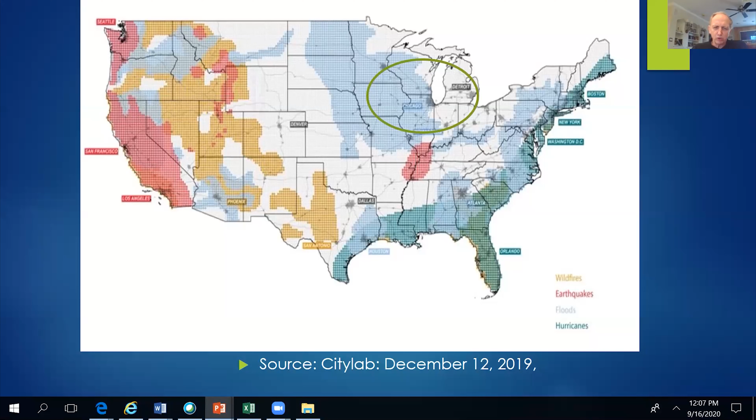But overall, Chicago is sometimes described—and I say this carefully because nobody's a winner of climate change—but if there is migration due to climate change, due to just the devastating effect, Chicago is probably positioned somewhat better than the coastal cities, which we'll get to in a minute.

Now, the reason this is so urgent is we know there's many factors that have caused this very frustrating decline in transit use since 2014, 15 roughly, where we're seeing a national dip in transit use. This is due to a multiplicity of factors. People always ask why, and unfortunately it's a laundry list. We won't go through those now. But a lot of the reasons: low fuel prices, active transportation options people prefer, and of course a lot of things with changing job patterns.

But we also know that when systems aren't resilient and they face catastrophic failure, two things happen. One, people often never come back. That unfortunately has happened around the country in some of the smaller systems where there's shutdowns and recovery takes years, if ever. But also, more importantly, people are reluctant to build a life around transit. So you want to park yourself next to a transit route, have either no car, maybe one car for an extended family, and use transit as a focal point. If there's any lingering doubt in your mind that this is not going to be a 365, 24-hour option, that option becomes less attractive. And we've experienced this in our region a number of times.

I think the one you probably remember most was the 2018 Yellow Line embankment washout, which kept—this links Skokie, the old Skokie Swift between Evanston and Howard Street, Skokie and Howard Street, excuse me—down for months and months. And it was partially a man-made problem, but it was a good indication that when systems fail, it can take much longer to repair if you're not, in fact, prepared with a clear resilience plan.

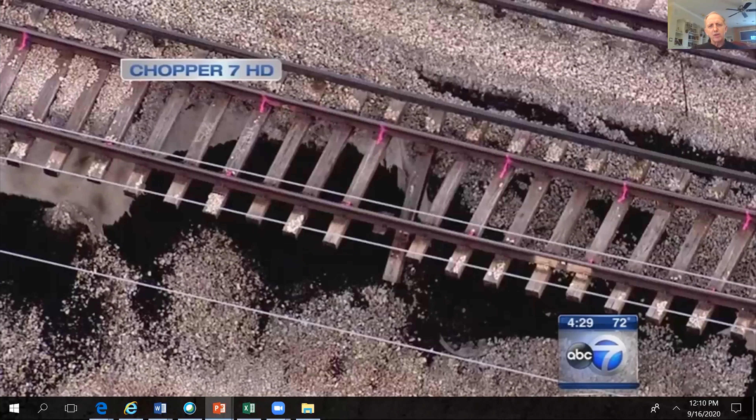This was a fluky accident, we'll see, but it seems like flukes are becoming more common now with the complexity of things. So I'd like to do—and you can see Yellow Line up here, it's an appendage of the system—but just to walk through, I think, why our system has addressed resiliency and made a lot of progress while still having, say, some major challenges that we've yet to address.

I'd like to start the story in 1957, which is not a date that's seen as a great day in the year of transit milestones, but this was the year we probably had our first taste, you might say, of contingency planning related to weather-related problems. This was a time when we had the Great Subway Flood. And this occurred when work was being done on the Congress Expressway, now the Eisenhower. You can see the median here, the transit line is being built.

In the process of building this, the pumps became filled with mud because they were building the Eisenhower, and it was dirt and it flooded. That prevented the drainage of water into the pipe system, and the pumps had to put the water into the Chicago River, which goes into Lake Michigan. I've since been told there was maybe a man-made failure to not open the locks, which made things worse. So it was partly a man-made crisis.

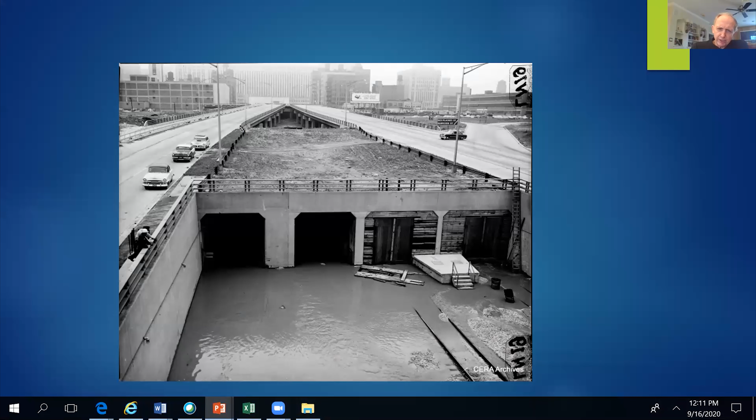But one thing it did was flood the subway, which wasn't opened yet here on this portion, and you can see the damage. It also flooded much of the Red Line and led to massive street closures around the city. Here's Union Station, which had its whole basement flooded. Much of the computer and mechanical equipment was in the basement of Union Station and suffered major damage. The trains were able to keep running, but it was an indication of how things can spiral.

This really should never have happened, because we have the system where the Chicago River dumps into Lake Michigan. Lake Michigan is typically low enough that we can open the locks - that creates a lot of environmental damage, but it prevents downtown flooding. When you throw in an unexpected problem like this, a man-made failure, you know that even the best of plans can fail. Union Station will come into our story a little bit later.

But with that, here's an example of flooding along the Milwaukee District line - the importance of flooding and pumping and gravity-powered design systems to relieve flooding. We've had continued problems with the Congress Expressway since then. It's one of our least resilient expressways because it's in a trough. So it was a bit of a wake-up call, but not a lot was done to our system at this point yet.

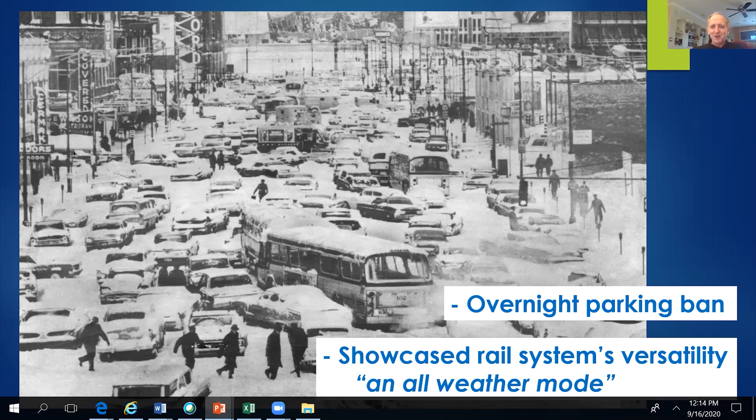I remember this movie, you guys remember this one, called The Out-of-Towners, which was about a storm in New York, and rail was the only thing running, and it was a mess. It was an example of how weather can - I think that's Jack Lemmon in the movie - it was just a great, almost advertisement for rail being more resilient than other modes.

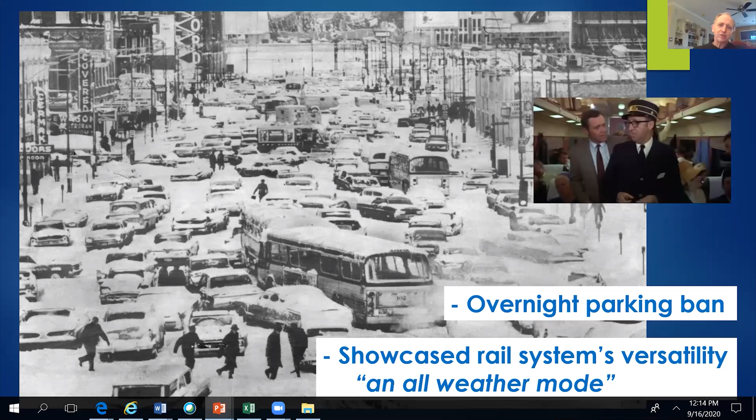But unfortunately, that image of rail maybe lulled us into a false sense of confidence, and then we had the great storm of December 31st, '78, New Year's Eve into '79. This is really where Chicago's vulnerability, its non-resilience, became unfortunately wide open, exposed. This storm began on New Year's Eve, but it was a series of storms, as we'll see.

A lot of you Chicago aficionados remember when Bilandic, the mayor, was running against Jane Byrne, the upstart, and this storm effectively catapulted Byrne's campaign into folk hero status as somebody who was going to do something about the terrible incompetence of our city in clearing the streets. We had days and days of gridlock and non-moving streets. But from the transit system's perspective, we'll see this was really the moment that Chicago began its ascent to become, in some ways, a troubleshooter.

So this was a terrible two-month-long thing. The powdery snow, this is from the Chicago L website, which is a great site. But we quickly saw the limits of our cars. The powdery snow was sucked right into the traction motors, these sort of self-ventilating motors, and choked off ventilation. So running these cars in the snow really exposed a weakness over time.

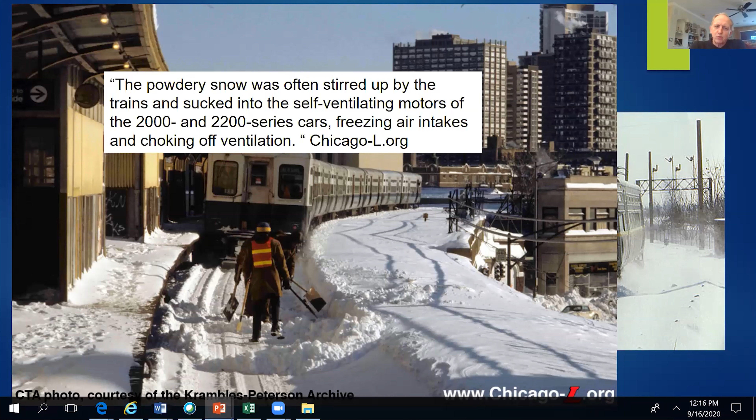And this brought Chicago to its knees. Offices were closed, and we'll see the CTA came up with some improvised snow plows. A lot of these were created on the spot, some were designed in CTA shops ahead of time, and this proved to be a really bad idea to run these things. Sometimes they just ran the cars without snow plows to try to clear the snow with the weight of the train, which is a kind of remarkable thing.

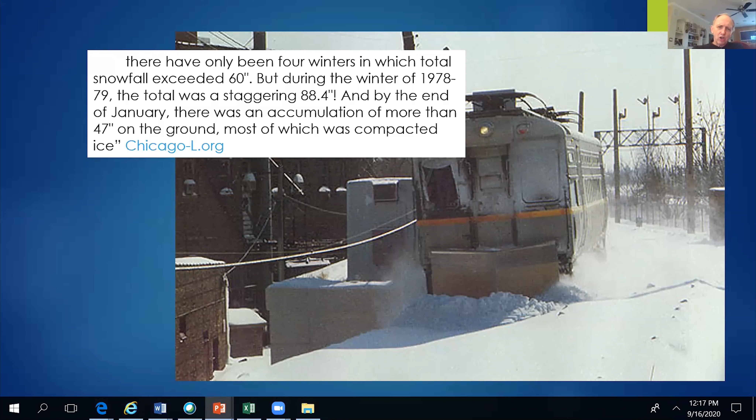We ended up having 88 inches of snow that winter, which is twice the average, 47 inches on the ground for a portion of it. This dragged on for weeks. I didn't move to Chicago until a few years later, but everybody was still talking about the legacy of this.

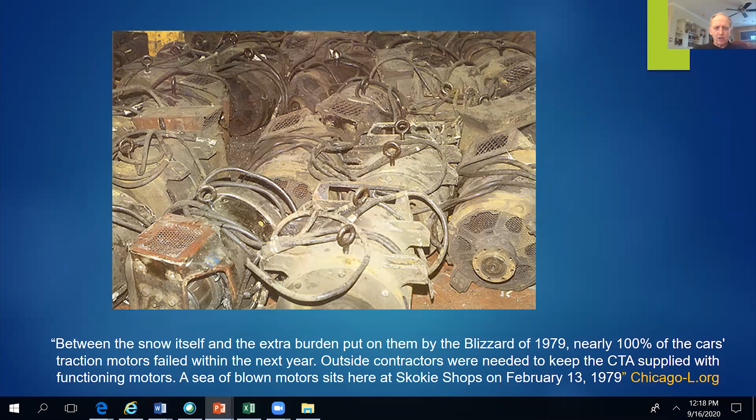But one remarkable thing happened, and this is an amazing statistic. Between the snow and the extra burden put on them by the blizzard of '79 - it was '78 and '79 - nearly 100% of the cars' traction motors failed within the next year because they didn't get the air intake they needed. They had moisture coming in from the snow, and at one point almost half the CTA cars were out of service because of the snow. Here's a stack of traction motors in Skokie. The system was just shown its utter vulnerability to this, it was incredibly expensive, and transit for the whole year was down because of the disruptions in service.

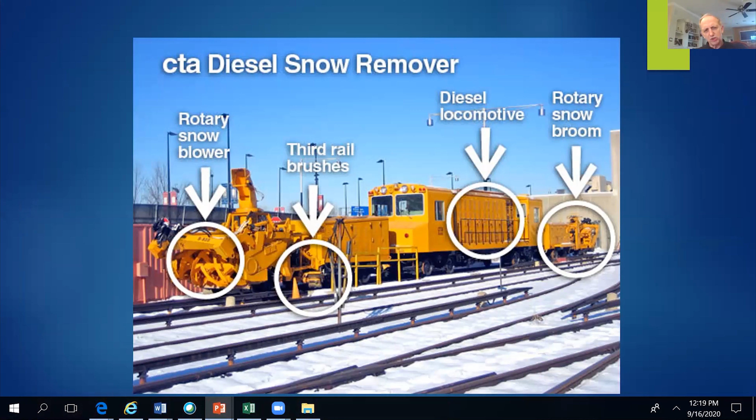So the CTA became in many ways a pioneer of dealing with snow, and we really learned the hard way. It took a while to get the system down. But with that, we've made specially designed snow blowers which you'll see on the system. Those are the third rail brushes I described, and there's a rotary snow broom in the back. So the '78-'79 storm really began this push toward custom-designed CTA cars due to our weather.

Also on the snow plow - and I say this being somewhat of an environmentalist - one legacy of that is we got the best system of snow plows and sand trucks and salt trucks in the country, you might say. And it kills me to see we get snow flurries and we have tons of salt being poured onto our streets just to prevent the 5% chance this could be the worst storm than we thought. So there's some environmental cost to having sand and salt dumped the way they are, but it's politically seen as imperative from the lessons of '79.

We also have a system now prioritizing a much more sophisticated system of snow emergency plans. Of course, you can't park on certain streets when we have snow emergencies coming, so that's expected - that's a legacy of the system as well. So Chicago with the winter, really has been a leader.

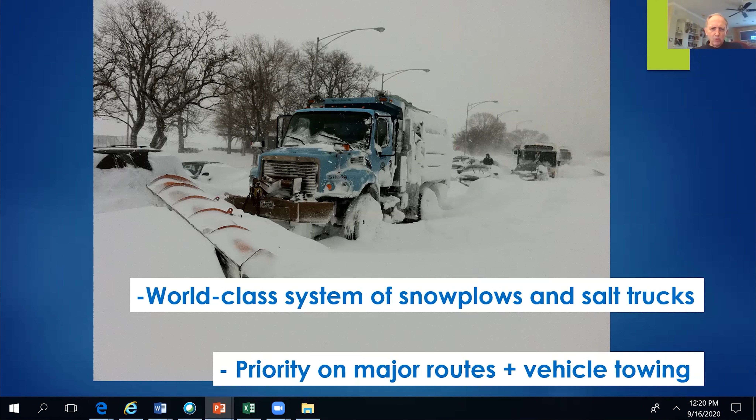Now in '92, we had the next crisis. I was actually at DePaul during this, and this was the Great Chicago Flood, which was caused by pilings being driven in the Chicago River up near Kinzie, near the Merchandise Mart. You can see on the right there.

And boy, this was a disaster that was almost 100% man-made, but it exposed, we'll see in many ways, our inability to understand the engineering of our system and to properly manage for human error.

And what happened here with these pilings was they were being driven into the river to create a support, and they punctured one of the tunnels that were built years ago near the early 20th century that linked all the rail stations, a system of underground tunnels that moved coal and commodities between the loop train stations and some of the big buildings below street, seen as a very environmentally cutting edge thing at the time.

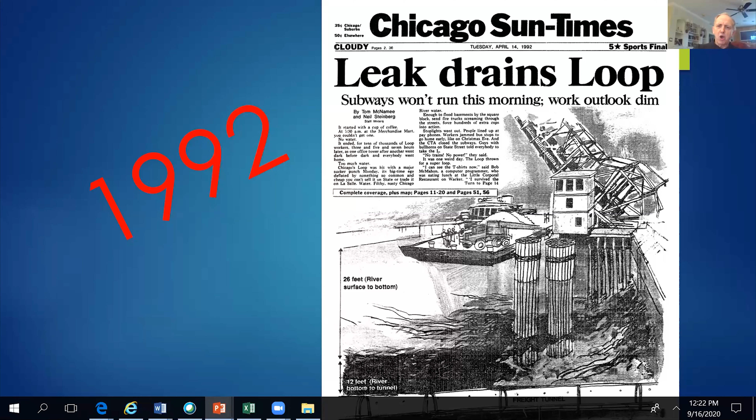Those were abandoned when the rail system, passenger trains diminished, but that tunnel system prevailed. And when flooding got into those tunnels, it really almost was an embarrassing set of compounding problems that devastated many building systems that were built below grade.

Here's a couple pictures of that from the DePaul era. For example, I direct the Chaddick Institute, and many of the Chaddick records were lost because they were in the basement of a building on Madison that were flooded.

And so once the tunnels flooded, the water rose almost to the level of the Chicago River. So anything below grade was damaged. And for a transit system, we had transit outages. Of course, the subways were badly affected by this, but it created a lot of issues with unsafe electrical conduits down there, with control systems being below grade.

And so it was a real indication that unanticipated problems are almost as bad as things you probably can anticipate, like weather. And it was an amazing day. I remember, fairly new at DePaul, just thousands of people heading to the train stations in late morning to go home, saying, 'You must go home, we have a flood.' Nobody knew what was happening.

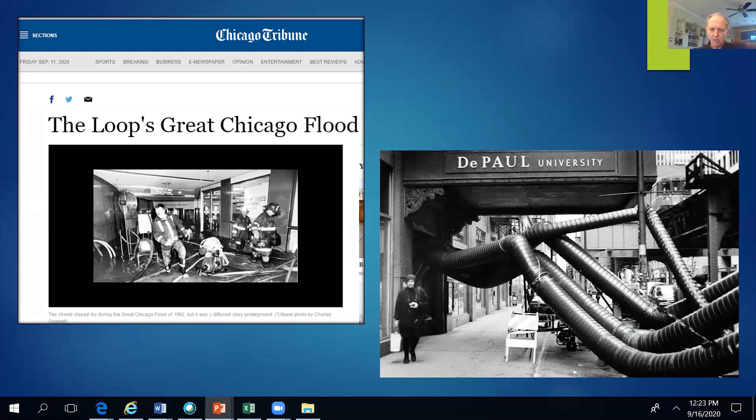And with that, here's another picture around DePaul. You can see just the water coming up from one of the manholes. But it really made clear to us that we're just stacking infrastructure on top of each other in the city.

You have decades of infrastructure, from utility corridors to tunnels to private easements to above ground telephone poles with substations, and we had sort of lacked a plan to troubleshoot if some aspect of the system was overlooked.

And we'll see here we ended up putting bulkheads on the tunnels below grade. A lot of changes were made where people ceased using basements, which is probably a bad idea to start out with in our region because we're so flat and we have trouble with drainage.

So the system, interesting enough, Union Station installed massive pumps after the 1957 flood, but 2 weeks before this disaster, I was talking to Mark Walbrun, and he said that they decided to move that stuff out of the basement, saying 'we had a flood in '57 while we had the pumps, this is probably not a good idea.'

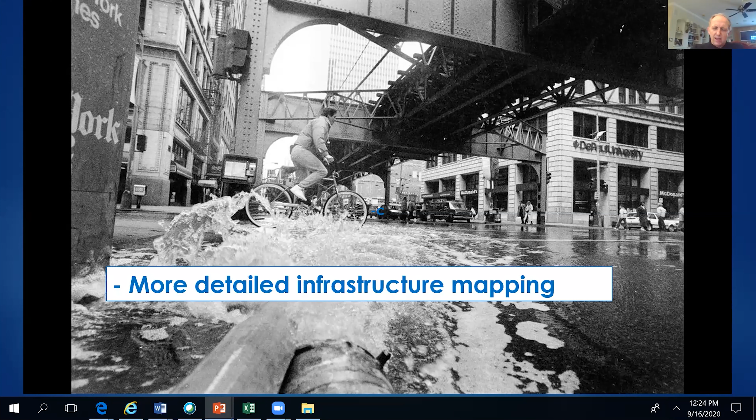So Union Station, most of the electric circuitry was moved above to the second floor. The trains kept running. So the Chicago flood is deeply etched in our need for layered analysis of our infrastructure before we take action.

But I will say it wasn't until 2012 that the word resilience came into common use. I don't remember personally using this term until after the 2012 crises that put to shame everything. It wasn't Chicago, but it was the effects in New York and the East Coast of Hurricane Sandy.

And the remarkable thing about this is we knew this was coming for days, and we could take actions to get people out of harm's way, but there was virtually nothing we could do to limit its effects. We can get the equipment put at the high ground, we can do our best, but when it came to the storm surge with Hurricane Sandy and the age of the infrastructure in New York, we had an outcome that was just staggering.

And what happened in New York is something we really didn't have during any of these crises in Chicago, and that was a sustained severing of the entire transit system. So if you're familiar with New York, you probably know that southern Manhattan is just a spider web of transit lines. The minute I think I know New York's transit system, I'm there and I discover a line that I didn't really notice before.

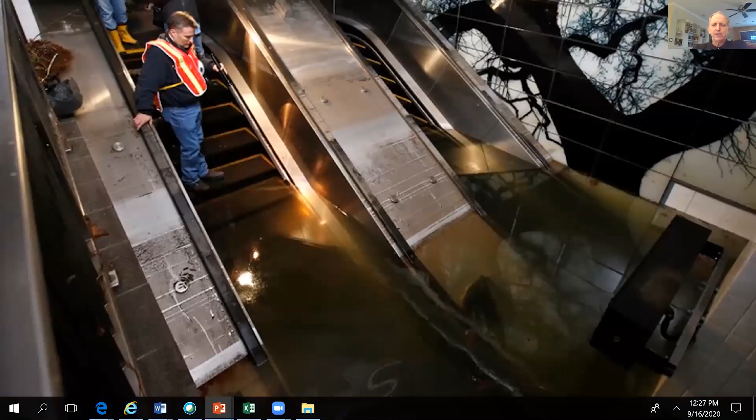But we saw with Hurricane Sandy that when things do get completely submerged, here's an escalator at one of the South Manhattan stations. You can see how high that water came up. Not only did it flood the tracks, but it crossed the platform with 5 feet to spare, which, when old equipment is exposed to water for that limited period, you can see where short circuits, accelerated rusting and depreciation is going to happen.

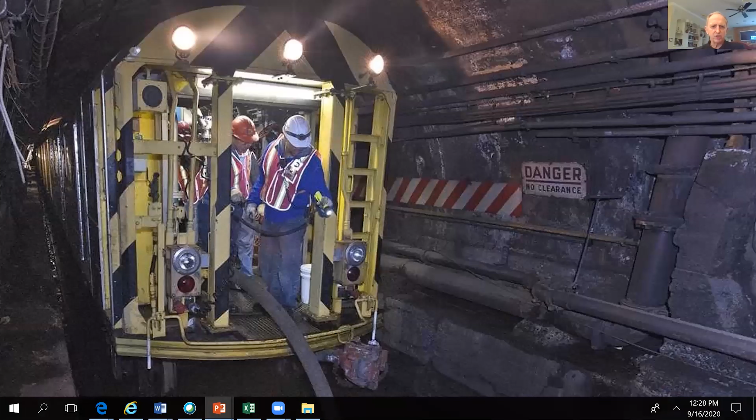So while they got the tunnels drained and could run trains at somewhat reduced frequency for a while, still today they're working to try to get the system back reliable. They had the Summer of Hell a few years ago, which was famous in transit circles because everything bad happened at once. Penn Station's problems, the subway problems. And they're finally digging themselves out of that.

Of course, COVID creates a new challenge of how it's all going to be paid for. But it really rocked New York, and it started this whole movement that we have to quit looking at problems one at a time. Here's another picture of just some of the damage.

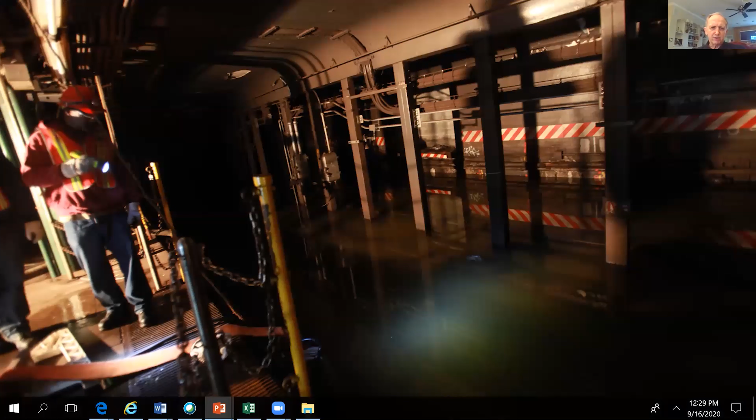We need to have full-blown resilience plans. And we'll talk about how this is more than just putting in the right equipment to prepare for disasters. It's actually to expect the kind of disasters that nobody saw coming.

So when we saw the resilience planning take effect, we saw a whole series of things happen.

I'll just say in 2014, the last thing in Chicago, we had the polar vortex. And those of us who are around as transit users, this is all the moment we said, why am I living in Chicago? I just remember weeks and weeks of walking to the train and just crunch on the hard packed snow. One day looked like the next, and it's dark by 6 o'clock.

And it just seemed, and the transit system had big problems during this period. Mainly the electric line, which I used, was over in the South Shore line. We'll see the electric Catenary had problems, but buses were freezing up. Wasn't a disaster system-wide, but it was periodic outages.

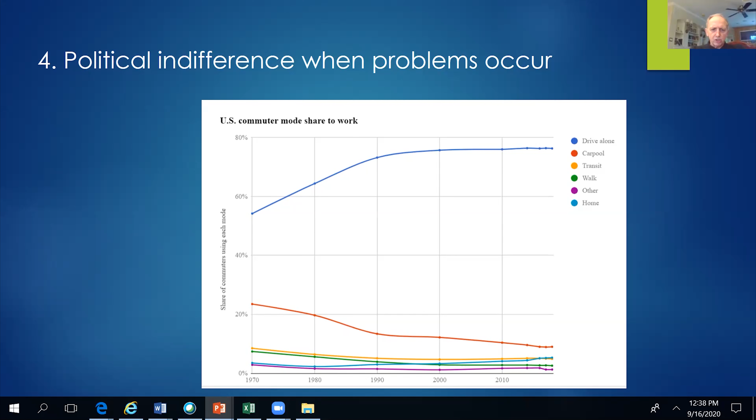So when we look at the sustainability of the system, we can see we're making pretty good progress in some areas. In other areas, we're still pretty deficient.

One thing I'd say we did a great job on: the whole CTA system is now third rail. In 2004 we converted the Skokie Swift yellow line from electric overhead catenary to third rail, which has really improved reliability during extreme weather events. That line now has a lot of momentum, with some new stations and other improvements.

We also saw the South Shore line complete a full replacement of their old catenary system. It's been a major, gradual project, really exciting to watch the South Shore line go from a sleepy interurban to a pretty cutting-edge urban railroad. This year they're starting a new branch that will run the West Lake corridor down to Munster, reclaiming an abandoned railroad route. That segment will be diesel powered, but the trains will enter the main line and use electric to reach downtown. So the South Shore line is really exciting to see at a time when there are so few new rail projects happening.

It's a double-track project being done in very interesting, successful stages. And the CTA and Metra now have much better power redundancy on their electric lines than they used to, so we don't get the outages we used to have when a substation fails. I think those are pretty good successes.

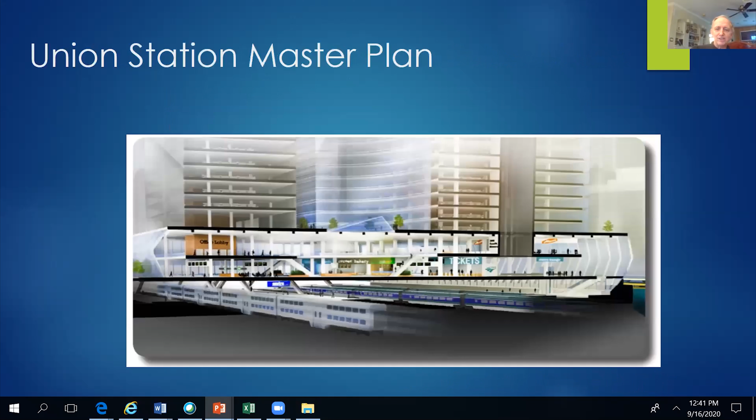More importantly, Union Station has this massive overhaul underway, being done in stages. There are all kinds of issues with the station now, from ventilation to older concrete that needs replacing. Amtrak, developers, and Metra have been gradually improving Union Station. The Great Hall looks great now, and some of the latest efforts are focused on the track design.

One thing that makes life so much better now—we're seeing this play out during COVID—is that we have all these other options we didn't have before. We have the second scooter pilot happening now, and we also have car sharing: Zipcar is all over town. We lost Car2Go last year, which was a shame, because they had a different model than Zipcar where you just paid by the minute. We also have electric bikes being deployed, and of course a system of bike lanes. So in some ways, when the transit system goes down, we now have much better ways to get around.

We're seeing this during COVID, when transit's running but people may not feel safe, so they're using these alternative options. Uber and Lyft are part of that mix in a pretty big way. It's not quite like '79 when you had two options, transit or drive or walk, because biking was so trivial then. We have to view active transportation and micromobility as a pretty good escape valve. Of course, that doesn't do you much good when it's below zero to jump on a scooter, but COVID's mostly been a warm weather phenomenon.

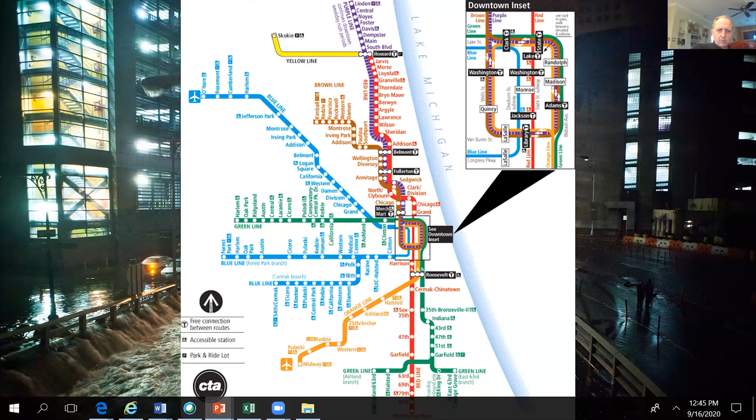You can see here in the Loop just the complexity of how we have those kinds of options, which is a remarkable thing. And a bonus, I'll say, we're doing really good at O'Hare and Midway, especially at O'Hare with the runway expansion plans. It's not transit, but it's indirectly related. With the runway expansions essentially being complete, now moving to the new global terminal, going to be built for Terminal 2—things are happening out there that are really good.

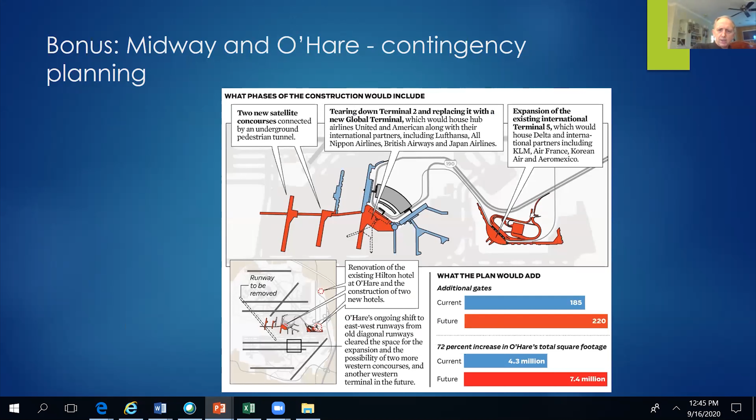So I'll call this works in progress—you might say these are weaknesses or challenges. Some of these are fixable without lots of money. Other things are just facts of life we have to contend with.

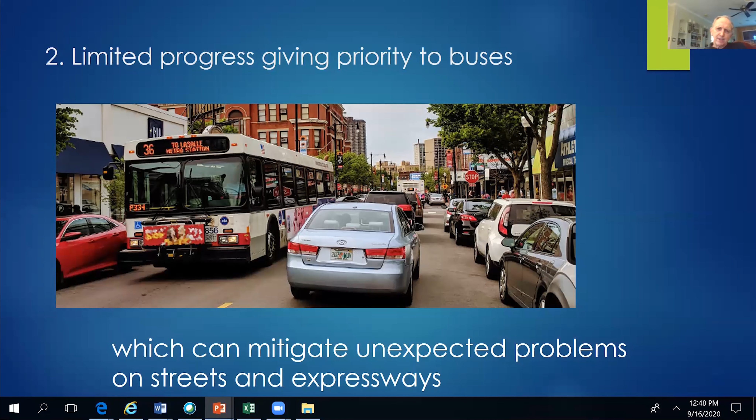But the RTA has a big system now to do signal prioritization, Ashland and Western, 100 miles of routes, 18 projects. So it's going to happen, but we're playing catch up there. Thankfully this project is moving ahead, but it's something we're behind other cities on.

We have some problems with relationships between railroads and public agencies. I won't get too specific here, but it's never a good sign when people are suing each other. Let's put it that way. We have a couple examples like that.

Amtrak is breathing down CN's neck for on-time performance. Metra and Amtrak at Union Station, there's some disputes. Union Pacific wants out of the operation of its commuter trains, so Metra are going back and forth. It's just an unfortunate reality that we're not always one big happy family, and that makes resilience much more difficult.

So I'm down to my last 2 minutes here, and we'll open up for questions.

Positive train control - this is the big mandate from the federal government, and in 5-10 years somebody will look back and say we're so glad we did this, but right now we're still in the painful stage where massive resources are going to this safety system. It does one thing well - it really prevents collisions and human error - but it doesn't solve many of the other problems we have, and diverts money from those other causes.

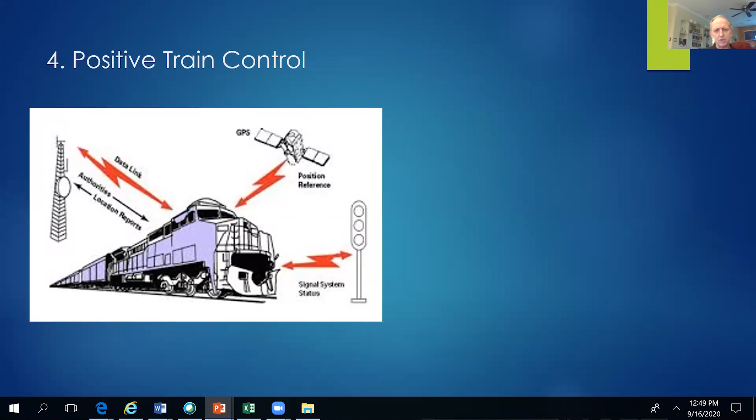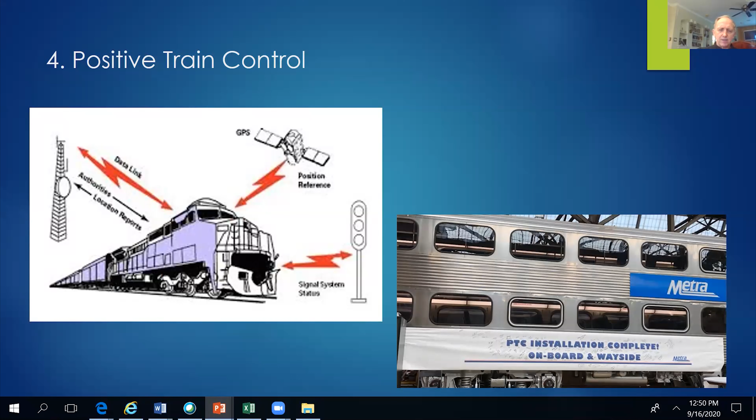Metra has got to meet the deadline, but I have to say it's at the moment created a lot of complexity to our ability to respond flexibly to emerging situations and threats because of the difficulty of adhering to all the mandates of positive train control.

Our viaducts and bridges continue to get older. Here's a success story, the Metra bridge over the Fox River, which was a big project. You can see just driving around that we have a lot of work to do there.

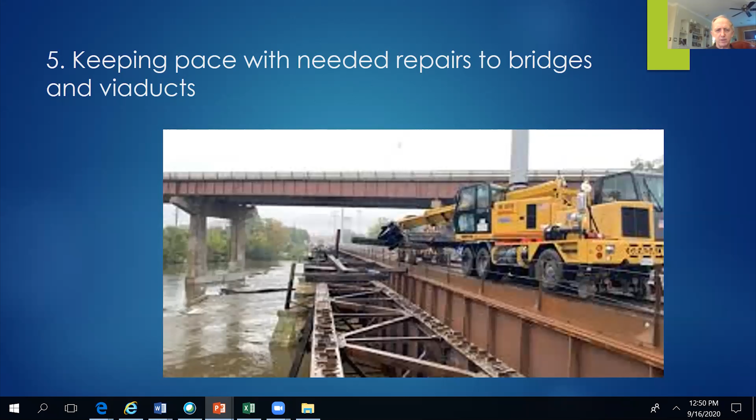Our pumping systems, a lot of this equipment dates back decades. If we were to have another major flood event, could our subways stay dry? Hard to know. Underpasses, below grade systems - a lot of the equipment is really aging, and so we have big vulnerabilities there.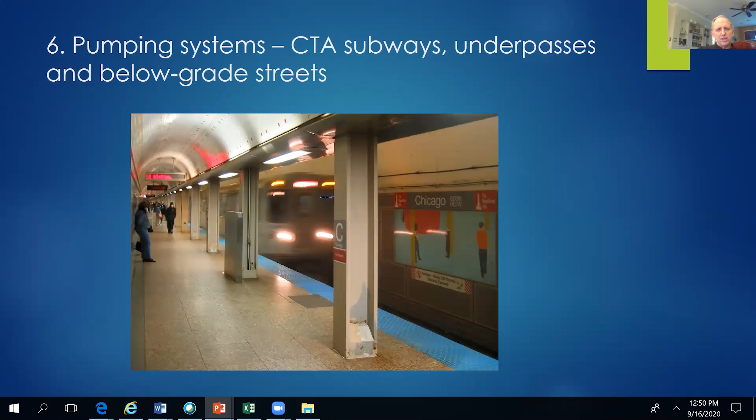I want to thank you all for a chance to present today on a topic that's a little bit different twist, and maybe get you ready for wintertime, which is coming. In closing, I want to invite everybody to an event we're having in about 2 weeks - we'll look at how out-of-service railroad corridors are being brought back into service around the country. If you want to attend, it's an evening event - just email Chaddick at DePaul.

Well, Ted, I think that's it for me. Do you want to kick into Q&A?

Well, thank you very much, Joe. Very informative, great webinar, really appreciate it. And we got some really great questions. I know some of this is already happening in the city, and this is one question: should some surface roads be converted to bus/bike only to ensure greater speed and public access?

Great point. I mean, we have the Loop Link downtown, of course, which is sort of a shared bus road system, and the grid really is an amazing thing. Despite angst in Ashland Western about bus rapid transit, about taking lanes away, mostly the grid can handle diversions of traffic for these kind of things. We've been slow to be too aggressive on this, partly because stoplight synchronization - if we create bus lanes and things, there's a lot of moving parts to get lights signalized correctly.

I do think we're going to see more of this, maybe not a full pedestrian street, but calming a street so you just have a lane of traffic in each direction for other modes. Interesting, interesting. Another question: should there be greater multimodal interconnectivity between regional transit and localized travel to increase access?